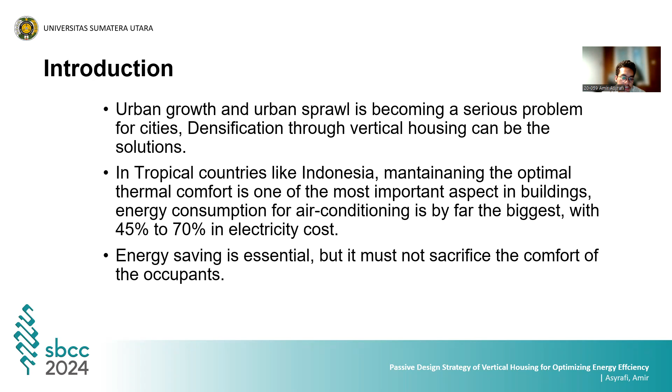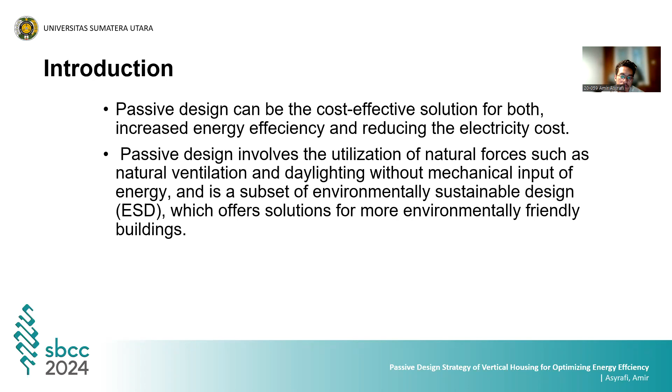Energy saving is essential, but it must not sacrifice the comfort of the occupants. Passive design can be the cost-effective solution for both increased energy efficiency and reducing the electricity costs. Passive design involves the utilization of natural forces, such as natural ventilation and daylighting, without any mechanical input of energy, and is a subset of environmentally sustainable design, or ESD, which offers solution for more environmentally friendly buildings.

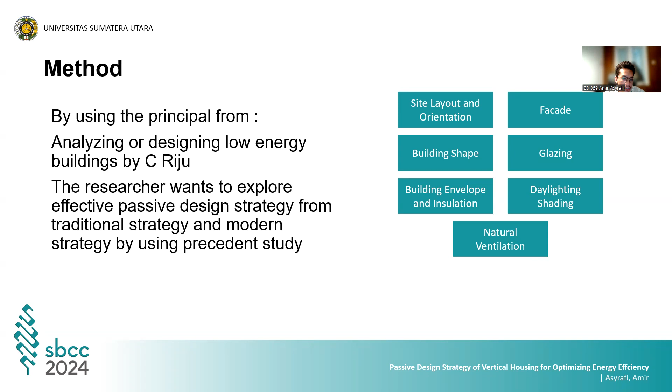For this research, I'll be using the principle from C Riju, the analyzing or designing low energy building, which consists of site layout and orientation, the building shape, the building envelope and insulation, the facades, the glazing, the daylighting and shading, and lastly, the natural ventilation. The researcher wants to explore effective passive design strategy from traditional strategy and modern strategy by using precedent study.

The result and discussion. First, I would like to discuss the traditional strategy. Many passive design strategies are found in traditional architecture in Indonesia. The shape expression against the climate consists of handling, protecting, obstructing, continuing, deflecting, and strengthening. Traditional houses typically consist of three main elements: the roof, including its covering, frame, and decoration; the walls, comprising solid section and opening like doors and windows; and the foundation, including the floor, column, posts, and foundation.

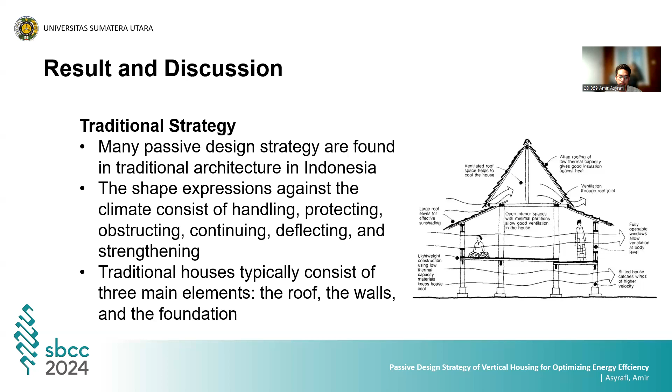Next is the modern strategy. After the independence, Indonesia finds itself within a frenzy of modernist ideas that also include architecture. Many first-generation architects, such as Friedrich Silaban, pioneered the idea of tropical modernist style that is suitable to the local climate. In the early 90s, the idea of tropical architecture became more advanced with lots of variation and new ideas for passive design. Architects such as Ken Yeang, Richard Hassell, and Wong Mun Sum from architecture firm Woha are two of the architects that focus on the tropical and green building in Southeast Asia.

The use of shading devices varied from louvre, panel, and eggcrate. One of the most predominant examples is the Roof-Roof House in Kuala Lumpur, designed by Ken Yeang. He implemented vertical roof panels on top of the main roof. The roofs are angled according to sun angle. It varies from morning, where sun angle is the lowest, to afternoon, where sun angle is the steepest.

The other great example is the monsoon window used in Woha's One Moulmein Rise in Singapore. It's an apartment building. The solution involved utilizing the thickness of the facade for climate control, drawing inspiration from Dayak longhouses in Borneo, which feature special horizontal openings beneath the projecting ledges to allow cool wind in while keeping the rain out.

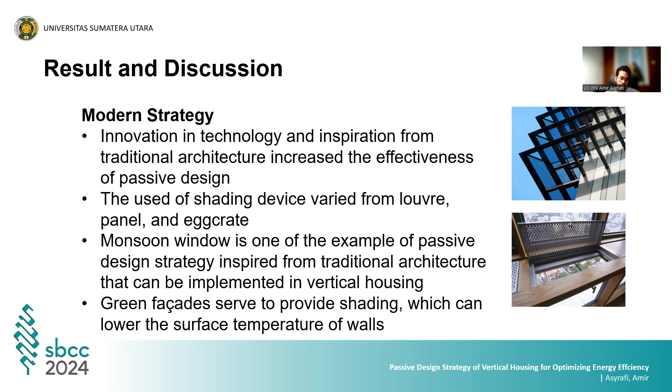Woha developed a contemporary version. They designed projecting bay windows that met the developer's needs for additional non-tax space, but incorporating sliding ledges. These ledges could be opened during cool weather to allow breezes in while still keeping the rain out, offering residents greater comfort and flexibility. And lastly, the green facade serves to provide shading, which can lower the surface temperature of the wall.